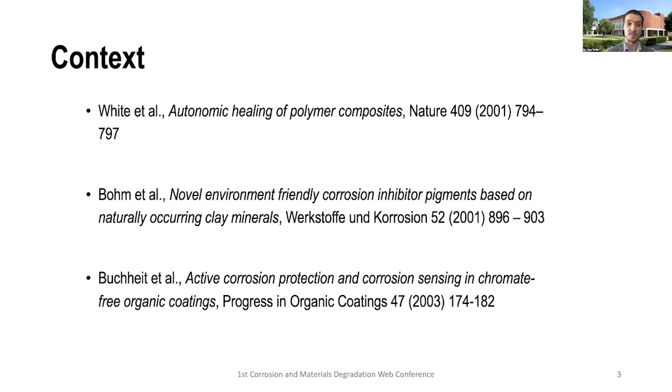Just to make a common ground on the understanding of the concept I'm going to talk about today, one of the ideas related to micro nano containers was that we would try to use a corrosion inhibitor, the active species conferring active protection, and somehow immobilize or encapsulate it in an inert or hosting structure, whose main function was to store and release these active species in a controlled way.

Hopefully the interaction of this corrosion inhibitor with the container would provide an additive for coatings that would eventually equalize or even surpass some of the most relevant inhibitors for certain applications, namely chromates, while removing the environmental or harmful effects associated with some of these species. I think this was one of the primary ideas and concepts coming into this field.

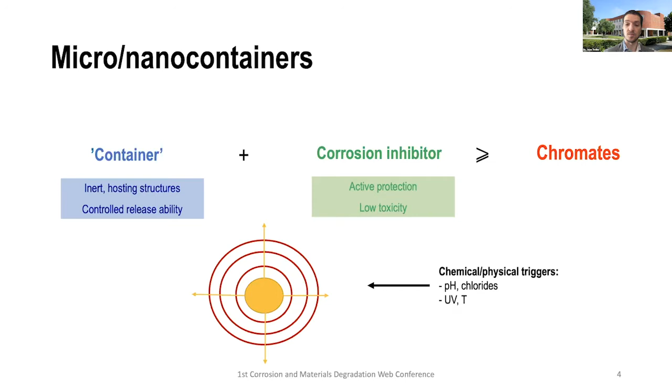The approach we have been following over the years, and I think most of us working in this field have been trying to follow, was basically different stages of development. In the beginning we would try to find the active species for the application. If we're talking about corrosion protection, it's a corrosion inhibitor; for corrosion detection, some molecule with a sensing ability; or for antifouling coatings, antifouling compounds.

So there was an initial stage of selecting and screening the active species. Then we would take into account the physical-chemical properties of these compounds and the targeted or wanted triggering conditions, and try to immobilize or encapsulate these species in different systems. The list is very wide: ion exchange clays, mesoporous materials, polymeric capsules. There are many systems published so far, too extensive to mention them all, but there are indeed several systems published by many groups around the world.

After this immobilization or encapsulation, the idea was to validate and evaluate the materials. So in addition to characterization of morphology, textural properties, and particle size, it was also relevant to validate the release mechanism and triggering conditions, and then test them in model coatings and modified coatings to really see if there was an increase in performance.

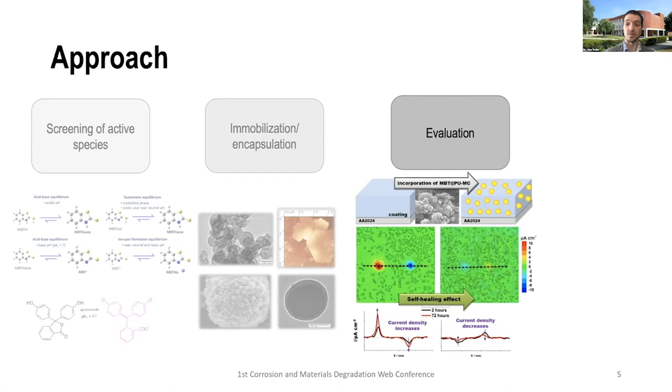If you're talking about corrosion protection, you're also talking about the extent of protection of the underlying substrate. But quite often it was also necessary to go through optimization stages, which include changing the surface of these materials to control or change the loading, or combine different species, but also, very often in collaboration with industry, it is necessary to modify the formulations. Coating formulations are complex systems, and to get the best of both worlds, a compromise between barrier properties and active corrosion protection, the recipe of the formulation often needs to be changed and addressed.

Now, looking at this approach, which I've tried to keep as general as possible, I find that we are currently living in a stage where, looking at these stages of development as a material scientist working more on the experimental field, there are several tools we can use to improve the way we design and get these materials and gather more information about them. That's basically the content of the topic I will cover now.

In terms of the screening of active species, I'll show a few examples of how we can use interactive data tools, machine learning, and molecular modeling to help us select active species. I'll also talk about materials design, showing examples of how we can use DFT and classical molecular dynamics to get a better understanding of the stability and dynamics of the release of active species.

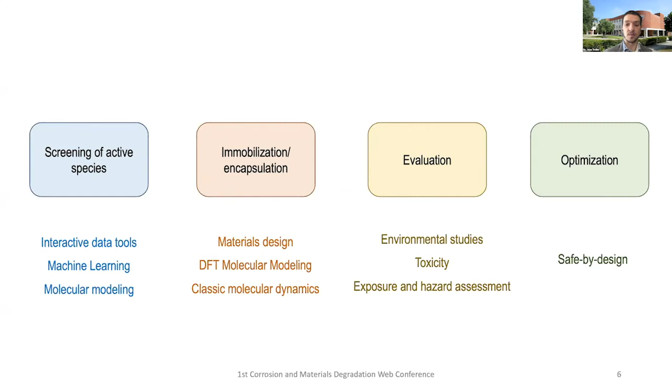Another possibility in terms of screening is using DFT, which has been used widely by some groups, not only to calculate adsorption energy and understand the interaction of the molecules with the hydroxides or the oxide, hydroxylated oxide, or the bare metal as a function of pH, but also to have insights on the speciation of the inhibitor in terms of acid-base equilibria and tautomeric equilibrium.

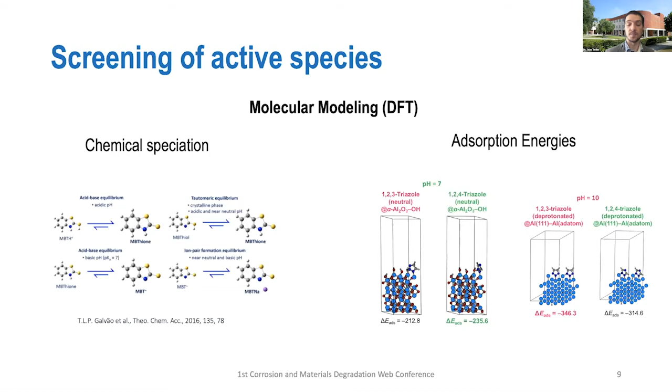Another possibility is to use molecular dynamics, and we can use ab initio molecular dynamics to, in addition to the adsorption energy and stability of the interaction, get information on the dynamics of the interaction. Here I'm showing an example of a triazole isomer interacting with the surface, and we can see that in the presence of chlorides there is competitive adsorption. We can use these models for very short time frames to understand this interaction.

We realized that this isomer of triazole was not very efficient from the experimental data we obtained, and we could understand this lower inhibition efficiency through this competitive adsorption with the chlorides on the surface. So we can use computational tools not only to obtain information on stability, but also on the dynamics of interaction.

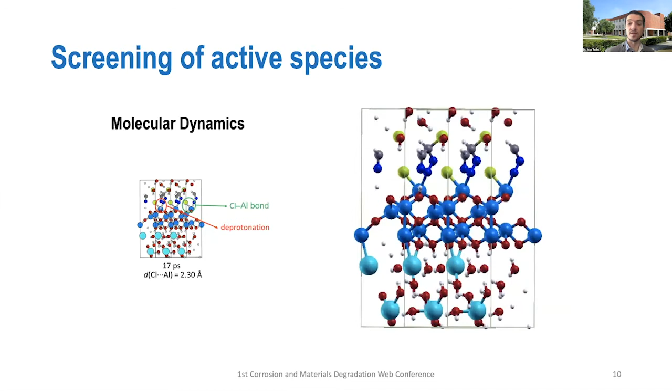Talking about materials design, one of the systems we have studied for a very long time is layered double hydroxides. These are ion exchange clays, built of positively charged mixed metal hydroxides. Between the mixed metal hydroxides, we have labile anions and water molecules which stabilize the structure.

A long time ago, we saw that depending on the inhibitor that intercalates, there is a controlled release, and we can use this to render active protection to the substrates.

However, despite being able to characterize and see the expansion of the basal spacing, the distance between the layers, when there is accommodation of the corrosion inhibitor, this is a structural proof that the compound is intercalated, and later we see by release studies that it is released. It's still necessary to have additional understanding of how the inhibitor is there, and how to have the molecule organized along with the water molecules.

So here we use classic molecular dynamics, and you can see in this snapshot of the simulation that the MBT, the 2-mercaptobenzothiazole used as the inhibitor, is interacting with the heteroatoms with the hydroxide sheets, while the aromatic ring points towards the middle of the gallery space.

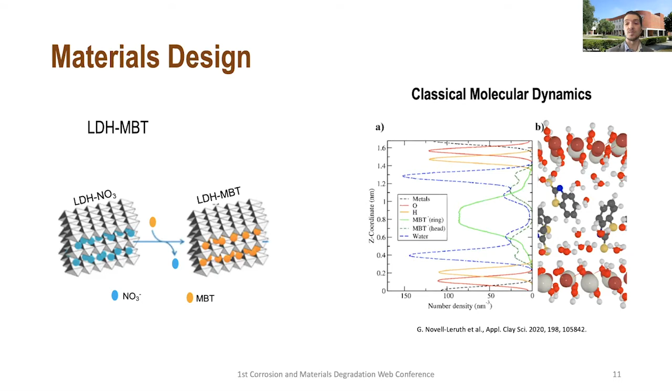In addition to these interactions, we could also see that the basal spacing obtained from this simulation was compatible and consistent with experimental XRD results. So these are examples of how we can use molecular dynamics to understand the position of the inhibitor within the galleries.

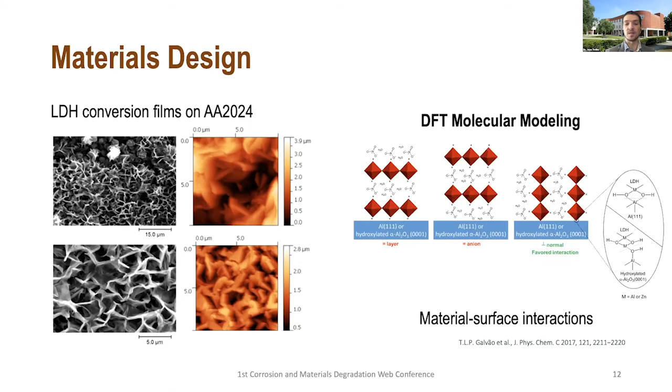Perhaps one of the most interesting things we have associated with LDH is this controlled release, this ion exchangeability, having exchange of intercalated inhibitor with some species in the environment, most notably chlorides.

We saw in 2012, in one of the studies we published, that there was a controlled dependence on the nitrate release from the LDH in the presence of chlorides. More recently, we tried also to use molecular dynamics to try to see the very first beginning of this interaction.

What I'm showing here is basically a stabilized LDH nanoplate in which we have the chlorides being exchanged on the edges of the LDH on a very short time frame. We are talking about a nanosecond time scale, and what we're trying to do is increase the simulation time so that we can see what happens in the later stages and try to approach more the experimental release time scale that we see.

Going to a more experimental approach, as I mentioned in the beginning of the presentation, it's also very important that we understand the environmental impact of the things we are trying to develop. MBT is a harmful species for the environment, although it's an effective inhibitor for aluminum alloys. One of the things we tried to address was the effect of having MBT intercalated on LDH for the environment, with respect to the non-encapsulated or immobilized MBT.

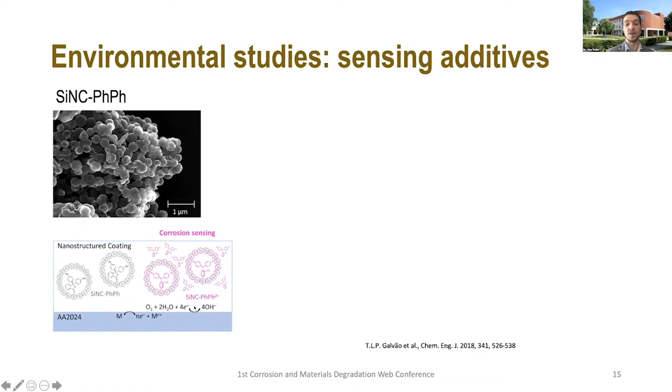Another study was done with additives that we wanted to use to help detect corrosion, coating degradation, or initiation of corrosion processes. One of the systems we developed was silica nanocapsules with phenolphthalein. We used a pH indicator to reveal increase in pH on a coated substrate, and we could see that only the encapsulated form was able to turn color, whereas the free phenolphthalein could not turn color. So there was a deactivation of the phenolphthalein when dispersed in the coating.

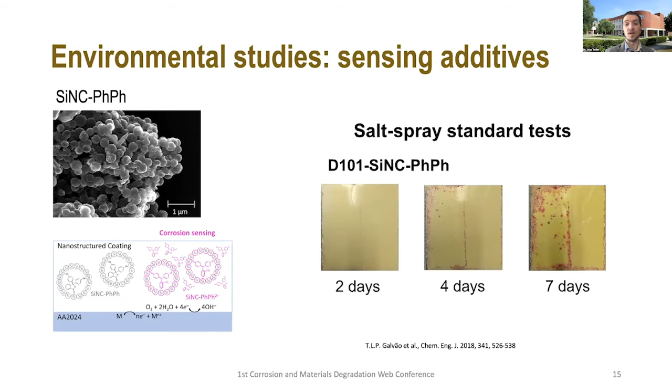Another type of additive we were considering was developed more recently. We intercalated hexacyanoferrate on LDH, and the idea was to control the release of hexacyanoferrate in presence of chlorides. We could see that the released hexacyanoferrate would then react with the iron cations from the anodic reaction and form the well-known blue pigment, Prussian blue.

We could see this not only upon anodic polarization, but also in a kind of drop experiment where we had sodium chloride solution with the LDH pigment dispersed. Over time, there is this yellowish color associated with the release of hexacyanoferrate in presence of chlorides, and with time you see the formation of the blue precipitate in the middle, associated with the reaction of iron with hexacyanoferrate.

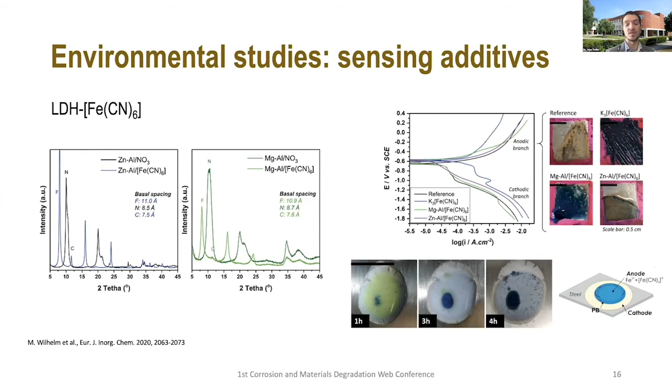So why am I presenting these additives here? Because not only do we want to change the coatings, but we also have to be sure about the environmental impact these materials can have. Our colleagues in environmental studies tried to see what would be the effect of the intercalated or immobilized versus the free sensing compound. They saw for the LDH, similar to MBT, that it was helping reduce the toxicity effect of the hexacyanoferrate, which was not very high compared to MBT.

But for phenolphthalein, we found different results. We saw that the silica phenolphthalein capsules were actually inducing more toxicity than the free phenolphthalein. This was ascribed to the presence of remnants of the surfactant from the synthesis. We could not remove the surfactant; we could try washing, but we could not calcine the silica, otherwise we would also calcine the phenolphthalein, which is also an organic compound, and we would lose the sensing ability.

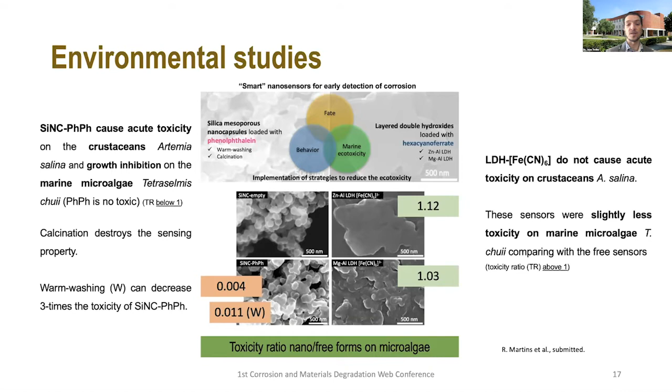So to introduce our last point of the presentation, we used this information to come back to the synthesis process and, using a safe-by-design strategy, try to see if we could change the material that we were using.

Instead of using CTAB to stabilize the emulsion, this is an oil-in-water emulsion used to encapsulate - here is the process for MBT, but it's similar for phenolphthalein - we tried to replace CTAB with a Gemini surfactant that we synthesized in the lab, which was found to be less toxic than CTAB. So we obtained the capsules, and here we can see an example of these silica nanocapsules obtained using another surfactant, and we were able to intercalate and immobilize this active compound, which was phenolphthalein.

The question was, were we able to reduce toxicity of these capsules with a different surfactant? Yes, indeed, we were able to see a reduction in toxicity when comparing the silicas obtained with the CTAB surfactant with respect to the Gemini surfactant. So it's not a fully non-toxic material, as we can see, but it shows a way we can follow as material scientists, to come back to the synthesis process.

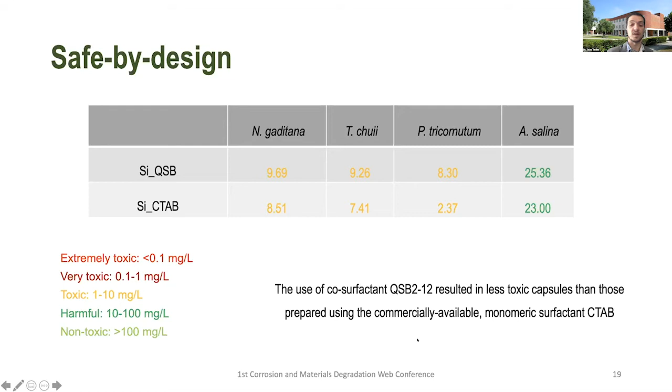So as I was saying, the use of this QSB2-12 surfactant results in less toxic capsules than those prepared with CTAB. Last but not least, I'd like to acknowledge all the funding, because I'm just showing here a glimpse of several works done in collaboration with different groups. I would like to thank the funding organizations and you all for your attention.

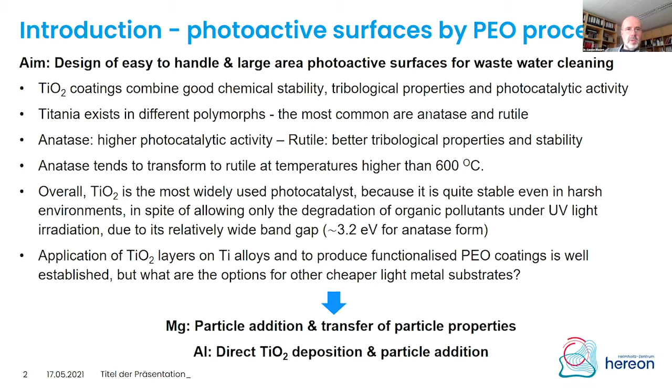However, those sparks are not only beneficial, they also damage the coating. There are remains of the discharge channels and also inclusions, because there are melted phases in which gases are dissolved. They also cause this porous layer structure because of gas inclusions and the remains of the sparks. Overall, the coating, one can say, is in most cases actually a composition of the alloy plus the electrolyte components we are using. One can use different processing conditions to adjust between amorphous and crystalline phases.

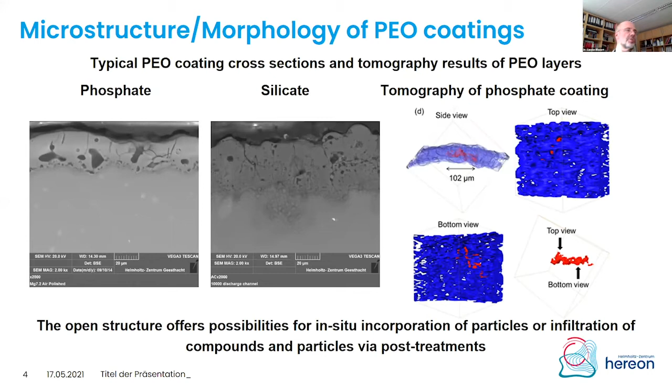So coming now to the first example, how we can functionalize magnesium alloys, I would like to show you a little of what we did. Basically you use a standard electrolyte, a phosphate-based electrolyte, and we added different amounts of titanium dioxide particles to the electrolyte, which is basically anatase because it has the better photocatalytic properties. We used two different voltages.

So it was a constant voltage processing in the PEO case at 400 and 500 volts, basically to see the effect of different energy levels on the incorporation of the particles.

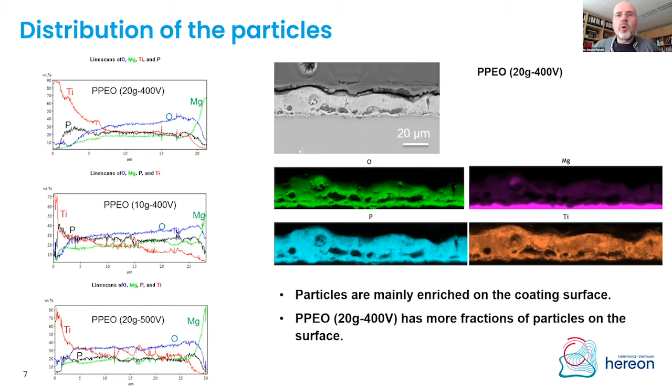Basically, you are continuously increasing the titanium dioxide concentration on the surface. Looking at the mapping and also the line scan, it's quite obvious that most of the particles are incorporated via the surface. They are sticking in melt pools on the surface and are immobilized there. However, there is titanium dioxide throughout the full layer, indicating there is a chance to incorporate them via the open pores, and they can even reach the interface.

So for the actual photocatalytic properties, it's more important that they stick at the surface. With increasing amount of titanium dioxide additive, we can continuously increase the titanium content on our surface, and with a 20 gram addition, regardless of whether it's running at 400 or 500 volts, we can reach somehow up to 20% titanium dioxide, or titanium, at the surface—titanium being an indication that we mainly have titanium dioxide. I'll show you this in the next slide.

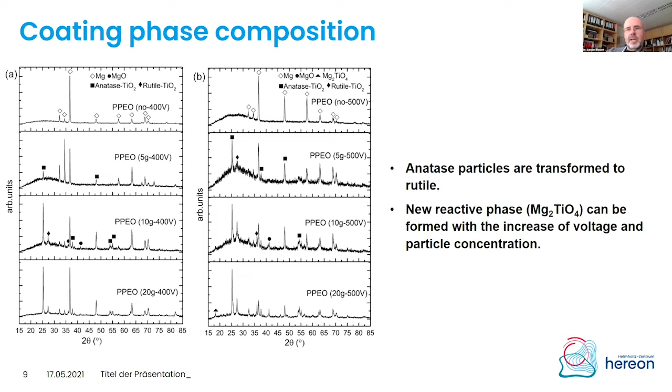So let me show you the second example, how we can functionalize the coatings—this is for aluminium. Now we have the chance to work with acidic electrolytes, which we did here; the pH was somewhere around 3. This is also an explanation why we cannot use the same approach for magnesium, because the magnesium PEO process cannot start with this pH value.

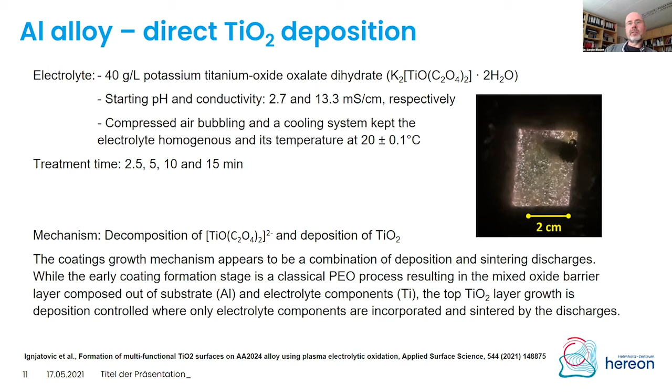Actually, it was even a surprise for us, because with this electrolyte, we have deposition of titanium dioxide, which comes obviously from a decomposition of the oxalate, titanium oxide oxalate complex. And that gives us the chance to actually get pure titanium dioxide layers on aluminium, where normally, when we do standard electrolytes, a treatment would give us aluminium oxide as the main phase.

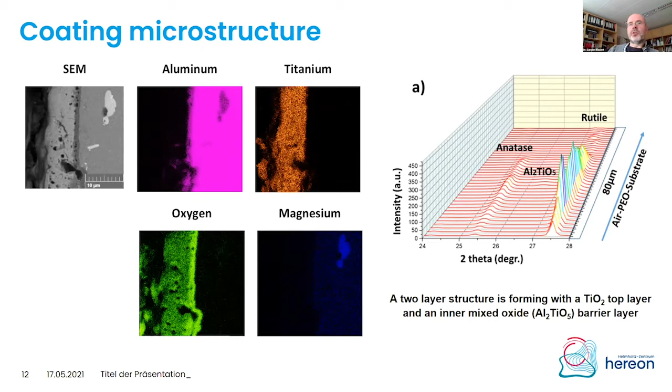And we were looking at the anatase and the rutile peak. This you see in this part, about 80 micrometers in depth. We were following the distribution of those two peaks. And you can also see here in the diffraction patterns that there's an interface layer related to the aluminium-titanium oxide 5 phase, the mixed oxide.

This is the second part of the aluminium presentation, dealing with how we can now get a better ratio between the anatase and the rutile. For that, we have added, similar to the magnesium example, from 5 up to 30 grams per liter of anatase particles to the electrolyte.

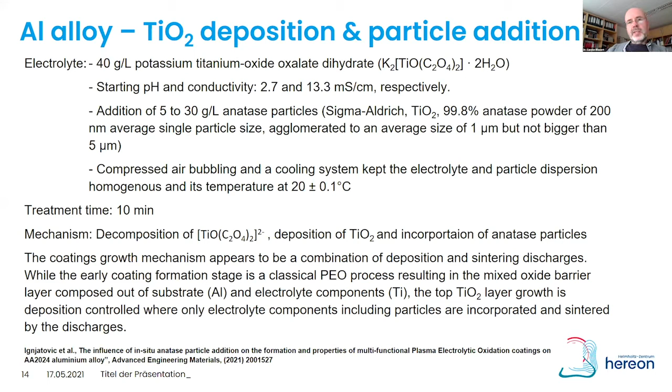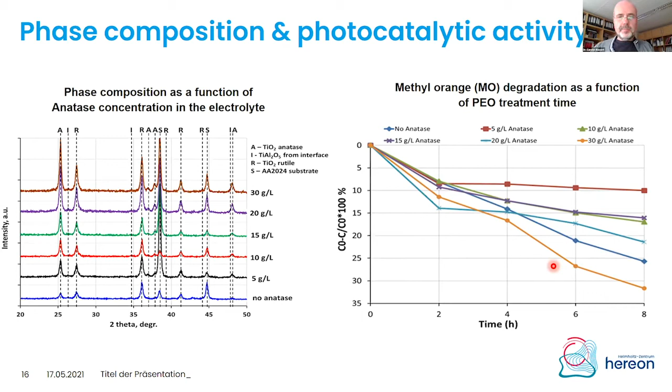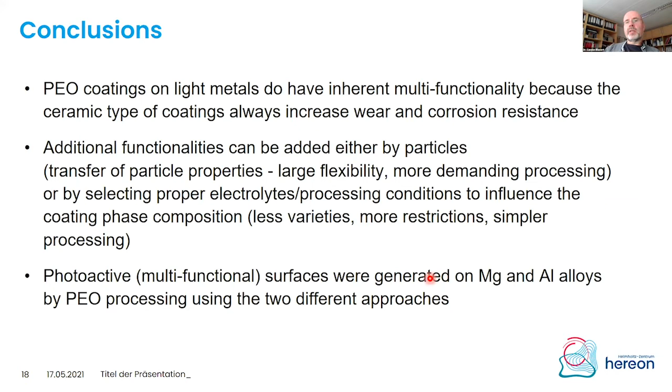However, particles in PEO processing are more demanding from the PEO side, so one has always to think about alternatives. For example, functionalizing the coating directly from a simple electrolyte is, from an industrial point of view, much more promising. However, you have less variety when you try this - you're more restrictive in the selection of substrate and electrolytes, but you have a much simpler PEO processing. Finally, photoactive surfaces can be generated on magnesium and aluminum alloys using the PEO process.

Thank you very much for your attention.

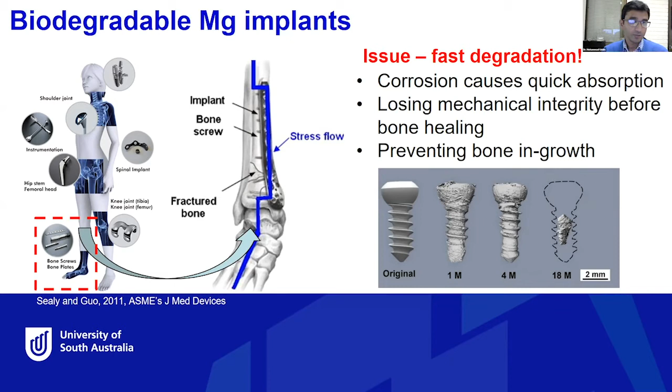There are many techniques being used in current research, as other speakers have already discussed in their presentations. So today, there are the techniques.

The first technique is developing a new type of alloy with magnesium, adding different chemical elements to really improve the microstructure and also improve the corrosion resistance and other mechanical properties. This is the first one people have been trying, but the problem with new alloying or adding new materials is there's always potential toxicity, so we need to do a lot of trial and test and study to understand what kind of new alloy or element could be added.

The next one is coating. This has been predominantly studied in the literature, and like other speakers already indicated, even Carsten mentioned, trying to use different types of coating, really biocompatible, thin to thick coatings, to really improve the corrosion resistance. Coating is generally very thin, it could be porous, and there is a potential of breakage and losing integrity. But still, some coatings have been quite successfully developed, providing quite beneficial effects in resisting corrosion.

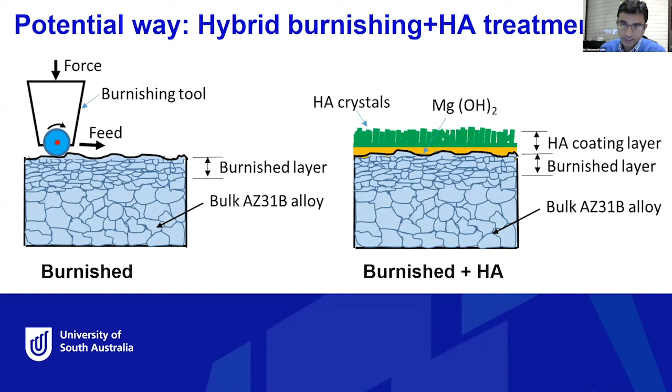So in this research we are studying this combined approach, which is a combination of ball burnishing and hydroxyapatite. We are going to do the ball burnishing first, and then deposit hydroxyapatite on top, and see how the combination of this hybrid modification or treatment can improve the surface integrity as well as the corrosion resistance. That is the objective we are trying to investigate in this particular study.

Some of the parameters involved in the ball burnishing and HA coating: ball burnishing was done with a very hard silicon carbide ceramic ball, 6 millimeters in diameter, using 200 bar of hydraulic pressure, equivalent to 565 Newtons, which is a fairly reasonable force to make modifications into the microstructure. The feed rate was 100 millimeters per minute, and 0.2 was the step-over, which is the side step.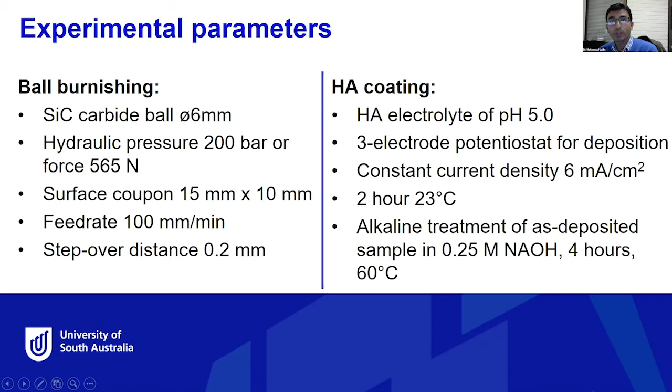After the electrodeposition of the HA coating on the sample, we then did an alkaline treatment in a 0.25 mole sodium hydroxide solution for 4 hours at 60 degrees centigrade. This is because HA is generally formed as a calcium phosphate based coating, which becomes very porous and amorphous, so we use the alkaline treatment to convert the biphasic HA coating into the complete HA coating.

So this is our surface topography, and we have done some surface roughness investigation. We can see that because the HA coating is a bit rough, and because of its plate-like structure, it's not very uniform or completely dense and homogeneous. Because of that, the surface roughness is higher compared to the untreated or burnished surface. So it's a bit rough surface.

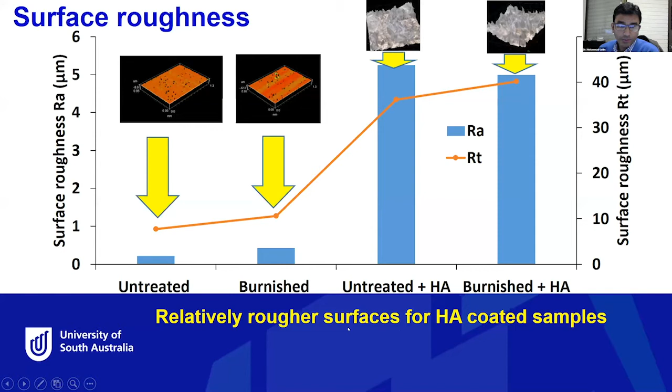We did some EDS analysis to see the chemical composition of the treated and untreated surfaces. Compared to the untreated and burnished surfaces, there is no coating present there. We can see the presence of calcium and phosphorus, which are the key elements of the HA coating, which indicates that the HA coatings were deposited onto the surface successfully.

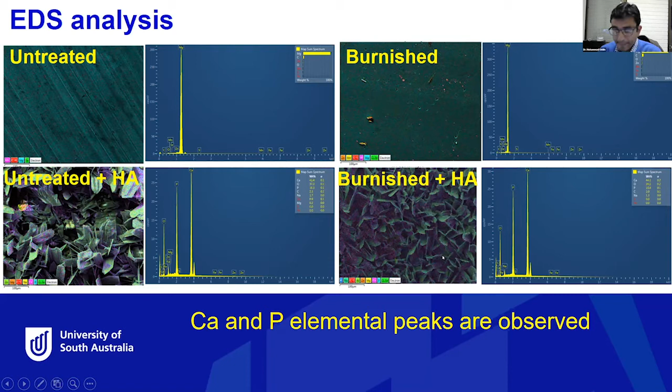In order to further investigate the chemical composition more accurately, to determine the presence of the elemental composition on the coating, we also performed XPS spectra analysis. The XPS analysis gives us more confirmation of the presence of the elements, since often the EDS may not give us the actual information.

We can see here the presence of calcium and phosphate, and also magnesium in the case of the untreated surface. We also have plenty of oxygen and some aluminum element here, which is part of the composition of the magnesium alloy, AZ31B.

We can see there is a little presence of magnesium in the case of the untreated and HA coated surface, because the HA coating covers the substrate. But in the case of the HA coated surface, either untreated plus HA or burnished plus HA, you can see a large peak of calcium, indicating its presence. Similarly, we have the phosphorus element present in our XPS spectra. This is another confirmation of the deposition and successful formation of the HA crystal.

One indicator of HA is the calcium phosphorus ratio, so we quantitatively analyzed what the calcium phosphorus ratio is. We found that for the HA coated surface, the calcium phosphorus ratio for burnished plus HA is around 1.62. But in the case of untreated plus HA, it is a little bit lower than even 1.62.

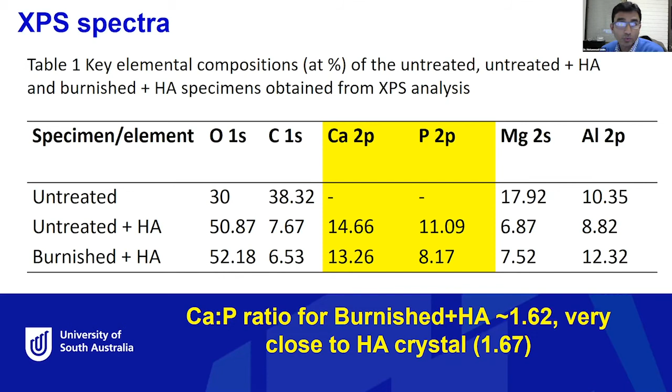We also looked into the cross-section of the coated surface, and we can see the cross-section of the HA coating by SEM and also the EDS.

This is the untreated plus HA coated cross-section. We can see that generally this is the substrate, and then there is a bit of formation of the magnesium hydroxide. This is very common when you deposit any kind of HA coating onto the magnesium, because it initially forms a magnesium hydroxide barrier, a very thin barrier layer, and then on top of that we have the HA coating.

We can see the same thing exactly in the burnished plus HA coating. One interesting thing is that in the case of untreated plus HA, the magnesium hydroxide layer is a bit thicker than when you do the HA coating on a burnished surface.

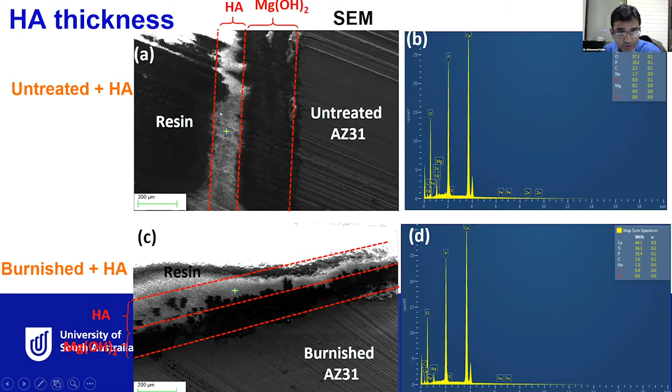So this is another benefit of the mechanical surface treatment — you can improve the mechanical property as well. To see what happened to the microstructure of this material, this is the untreated microstructure.

We can see that the grain of the microstructure is quite large, as you can see here, quite uniform with a large grain distribution.

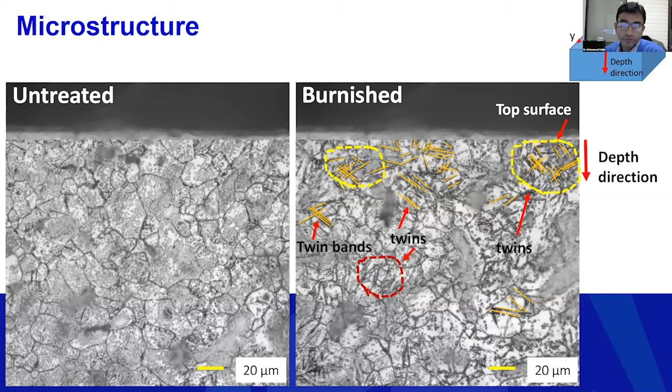We also looked into some other mechanical properties, residual stress. We can see that by applying the burnishing, we can induce a compressive residual stress into the top surface, and it decreases as you go down along the cross section.

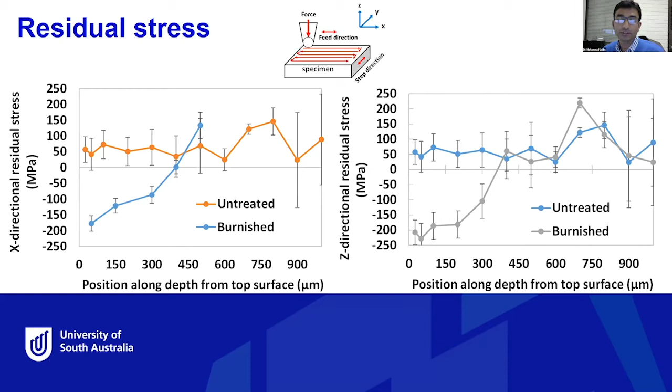Compressive residual stress is always beneficial in terms of suppressing potential cracks, and it's also going to prevent potential corrosion. We looked into the residual stress in the feed direction and the force direction during burnishing, and we can see that in both directions we have been able to create compressive residual stress rather than tensile stress. This is the benefit noted in the literature: compressive residual stress is always going to improve the corrosion resistance as well.

Just to see how the HA coating is actually bonded together with the surface. I think we have to come very soon to the end in order to not create further delay.

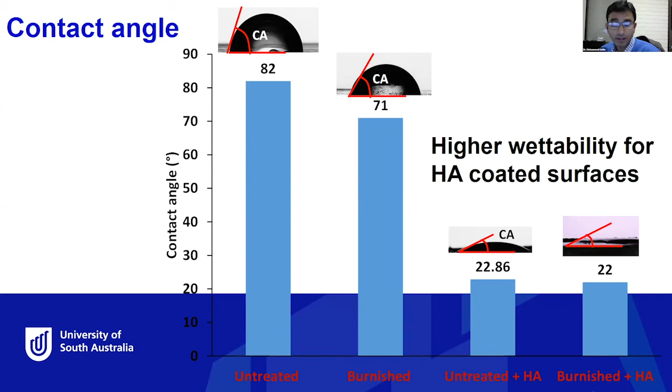This is the summary of the corrosion results, again indicating that burnish plus HA coating gives the highest corrosion resistance compared to the untreated or even the simply burnished surface. The corrosion potential is higher and the corrosion current is lower, meaning higher corrosion resistance.

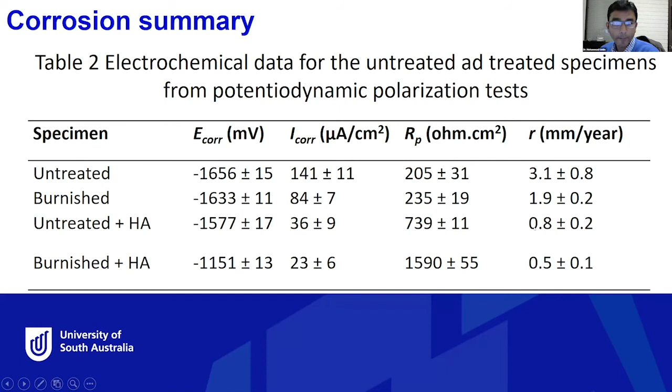Finally, I have a corroded elemental analysis, showing the retention of elements as the surface degrades. In the burnish plus HA coated surface, we see calcium and phosphorus increase, which is natural since it has an HA coating on top, but we see less magnesium in the burnish plus HA coating case. This means less degradation, or fewer corroded products generated, in the hybrid treated surface.

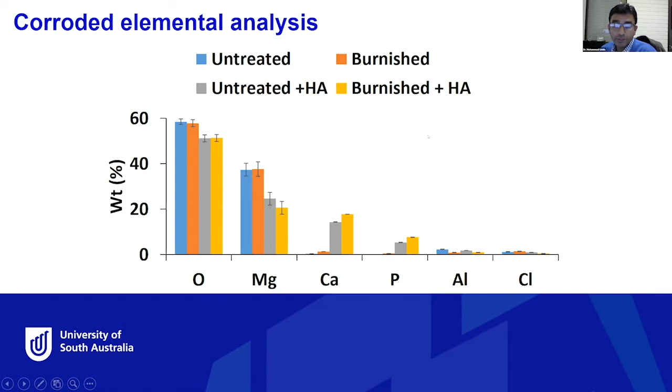To conclude, burnishing improves surface integrity in general, and we can deposit a very dense and compact, flat-like HA coating onto the burnished surface, with a thickness of 100 micrometers. Burnishing not only increases HA coating deposition but also increases hardness at the top surface. It induces microstructural changes up to 95 microns deep, with twins and twin bands, which we believe increases the surface activation energy that allows successful HA coating deposition.

Burnishing also induces compressive residual stress that is beneficial for reducing cracks and fatigue, and helpful for corrosion protection. We demonstrate that overall, burnished and burnished plus HA coated surfaces provide higher corrosion resistance, and hopefully this process will provide additional resistance against degradation, preventing degradation of the magnesium alloy. That's the end of the presentation, thank you very much for your time.

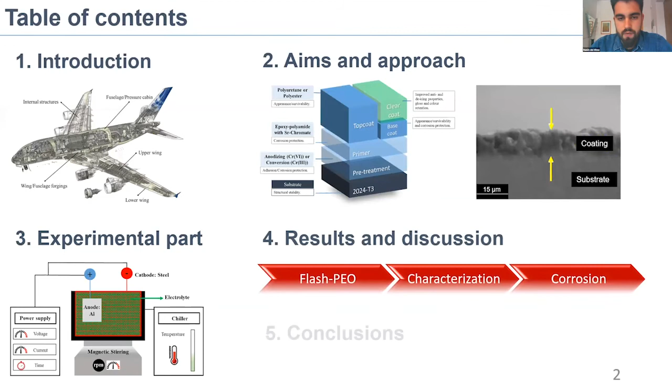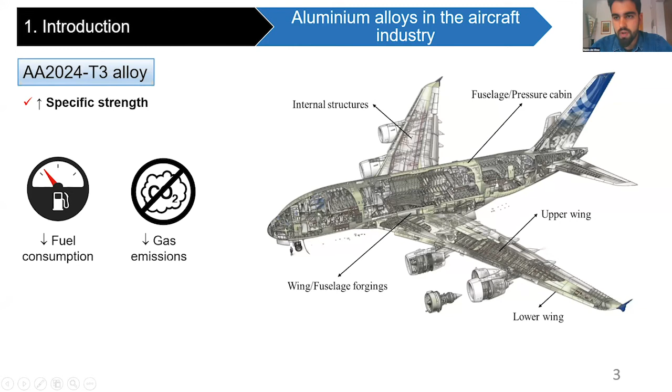First of all, I'd like to highlight that the most widely used aluminum alloy in the aircraft industry is 2024-T3 aluminum alloy. This is due to its high specific strength, which allows decreasing fuel consumption and gas emission during the aircraft life service. However, the main limitation of this alloy is its low corrosion resistance.

For this reason, this alloy is usually surface treated with a multi-layered protection scheme, which consists of a pretreatment, a primer layer, and a mono or bilayered paint system, depending on its application. It should be noted that the quality of this multi-layer protection scheme depends on the quality of the pretreatment, which must show high adhesion and corrosion protection.

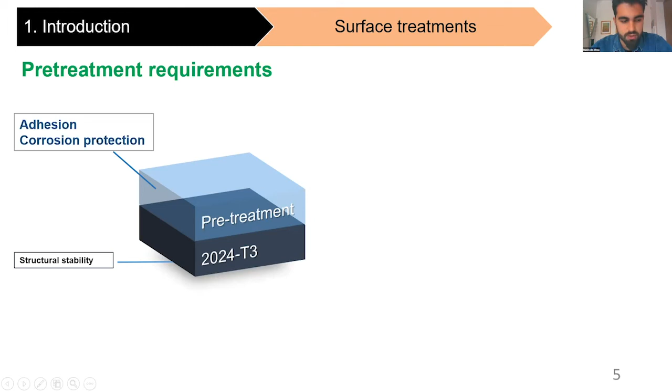So far, the most widely used surface treatment is chromic acid anodizing, which promotes the formation of uniform coatings with thickness between 2 and 7 microns. It's valid for fatigue critical components, offers fair paint adhesion and excellent corrosion resistance. However, the use of chromium-based compounds has been targeted as toxic and carcinogenic, so the European Union required its elimination before 2024.

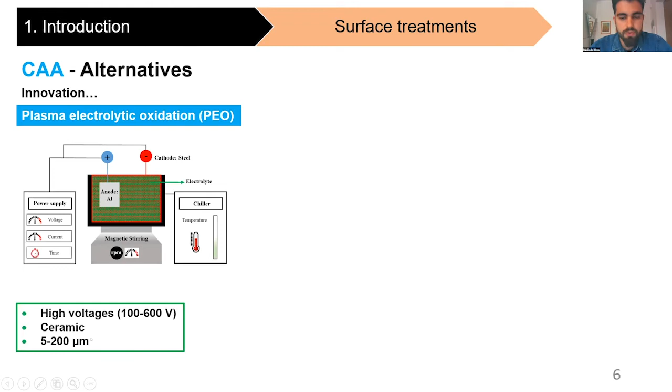An innovative alternative is plasma-electrolytic oxidation, PEO, which is an electrochemical treatment characterized by the use of high voltages and long treatment times, giving rise to the formation of ceramic coatings with thickness between 5 and 200 micrometers. This is conventionally useful for wear-sensitive applications in the aircraft industry.

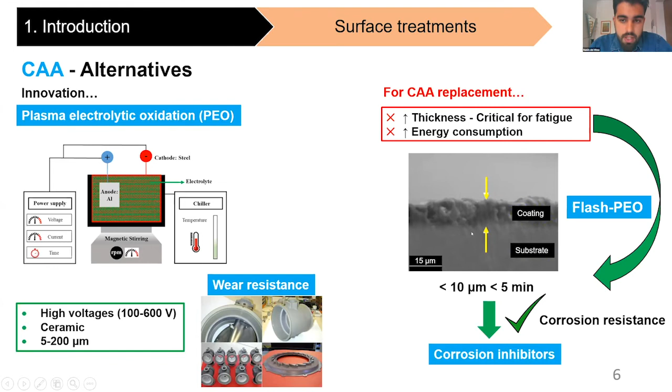However, for chromic acid anodizing replacement, this high thickness value is critical for fatigue-sensitive components, and the inherent condition of this process involves high energy consumption. So a possible way to overcome this limitation is the formation of flash PEO process, which consists in the formation of PEO coatings with low thickness value using low treatment times. A possible way to increase its corrosion resistance is the incorporation of corrosion inhibitors into the coating structure.

So the main goal of the present work is growth of flash PEO coatings on 2024-T3 aluminum alloy with the incorporation of several corrosion inhibitors. Then perform a screening process based on surface appearance, thickness, and corrosion resistance. Finally, evaluate the selected coatings according to characterization techniques, corrosion behavior, and paint adhesion.

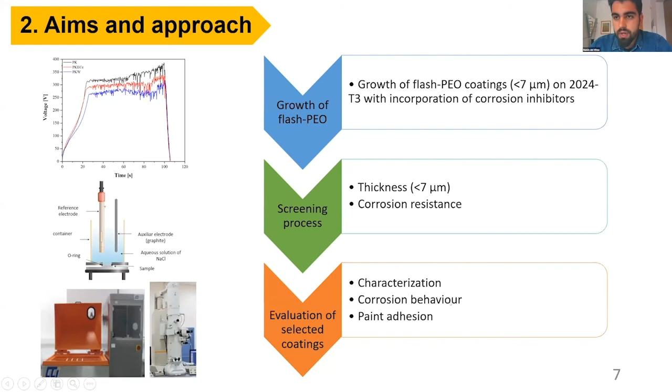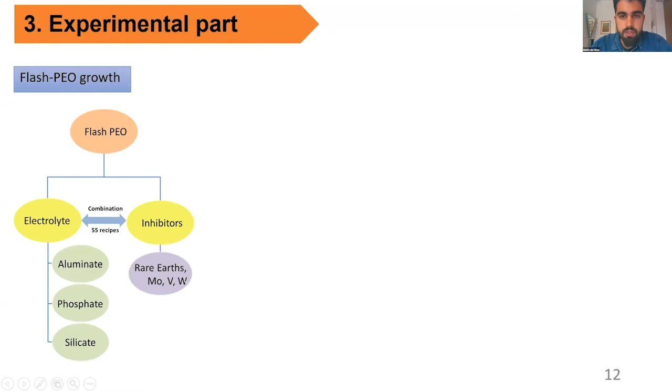Regarding the experimental part, our base material is 2024-T3 aluminum alloy. We performed the specimen preparation according to industrial procedure prescribed by Henkel company. We studied the formation of flash PEO coatings using several types of electrolytes and different corrosion inhibitors, and studied these coatings by characterization techniques like scanning electron microscopy, X-ray diffraction, and water contact angle.

The corrosion evaluation was performed by electrochemical impedance spectroscopy and neutral salt spray test according to aircraft standard. Paint adhesion capacity was performed according to this standard and with paints provided by AkzoNobel.

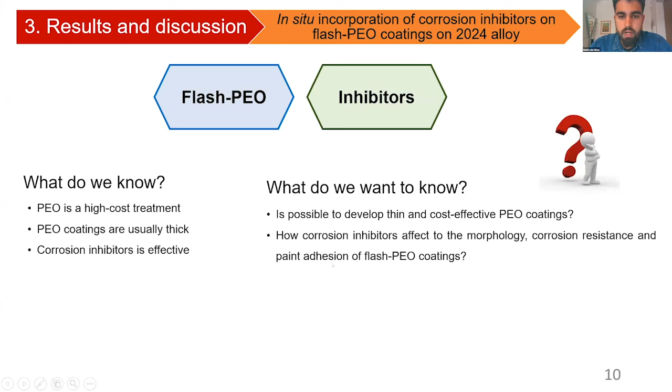At this moment, we know that PEO is a high-cost treatment, PEO coatings are usually thick, and corrosion inhibitors are an effective way to increase the corrosion performance. So we would like to know if it's possible to develop thin and cost-effective PEO coatings on 2024 aluminum alloy, and how corrosion inhibitors affect the morphology, corrosion behavior, and paint adhesion of these flash PEO coatings.

So for this, our first stage was to perform a screening process using low current densities, a voltage limitation, and short treatment times in different electrolytes. After the first screening process, based on electrochemical measurements, we concluded that phosphate electrolyte is the most suitable to study inhibitor loading processes. We studied vanadate, molybdate, lanthanum, tin, tungstate, and cerium.

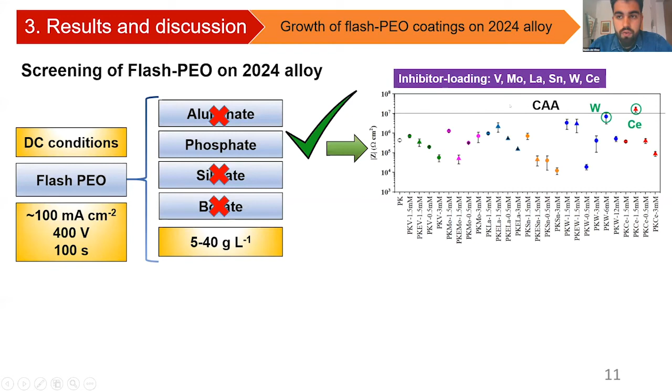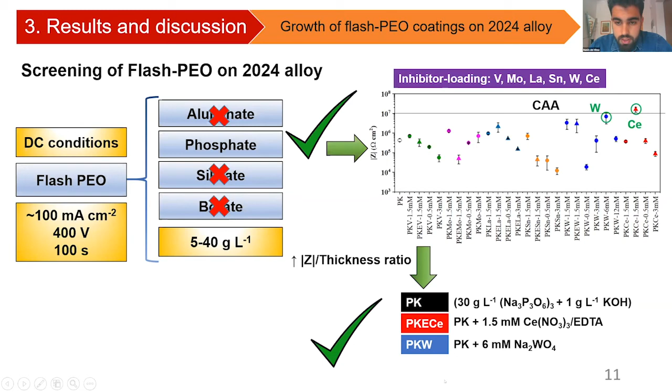According to the impedance modulus during 1 hour of immersion time in sodium chloride solution, we concluded that cerium-containing and tungstate-containing flash PEO coatings were the most corrosion resistant coatings. So for this reason, these coatings were selected for further analysis.

The voltage-time curves of these coatings reveal similar trends in all cases. For inhibitor-free PEO coating, the black curve, and red and blue for inhibitor-containing coatings with cerium and tungstate, which reveal lower voltage values and lower breakdown voltage values also.

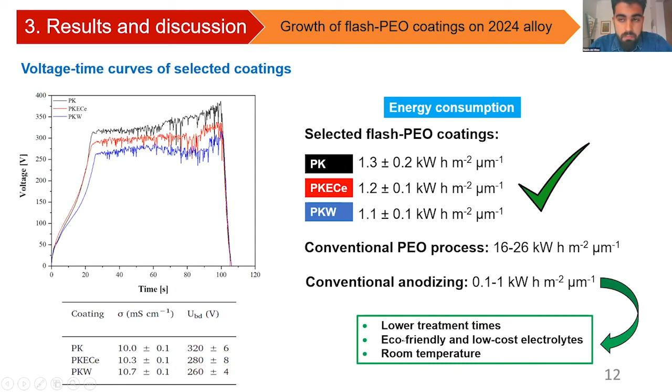The energy consumption of these coatings was significantly lower in comparison to conventional PEO process. It's true that compared to conventional anodizing we get slightly higher values, but as a counterbalance we use lower treatment times, an eco-friendly and low-cost electrolyte, and we perform the formation of these coatings at room temperature.

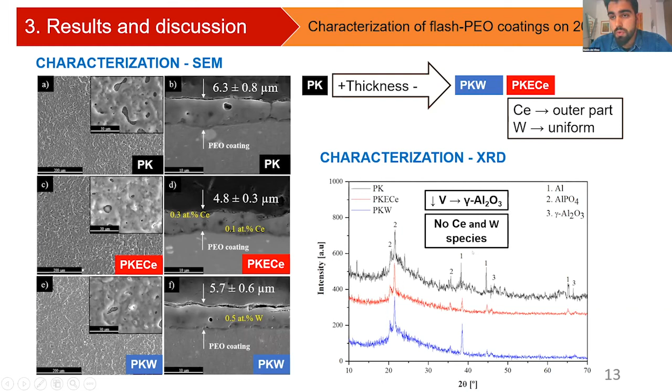The X-ray diffraction patterns reveal the formation of gamma alumina as the most predominant phase, probably due to the low voltage used in the present work. No cerium or tungstate species were detected in these X-ray diffraction patterns, probably due to their low concentration in the electrolyte.

Regarding corrosion behavior, in short-term studies we achieve higher corrosion resistance for inhibitor-containing PEO coatings compared to inhibitor-free, which could be related to less soluble cerium and tungstate species in the coating structure. Although in the case of long-term corrosion study, we achieve similar corrosion protection.

Regarding water contact angle values, we confirm that all coatings were hydrophilic. For inhibitor-free PEO coating we achieve very bad paint adhesion. By contrast, for inhibitor-containing PEO coatings we achieve improved paint adhesion, especially optimal in the case of cerium-containing flash PEO coating.

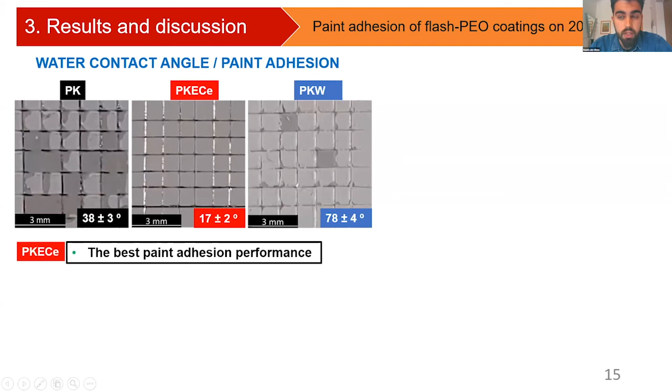Then we evaluated this corrosion behavior as a full system with paint, using neutral salt spray test for 1,000 hours on both inhibitor-containing PEO coatings, and we obtained similar long-term corrosion behavior in both cases. We also didn't detect any blisters or pitting formation during the test.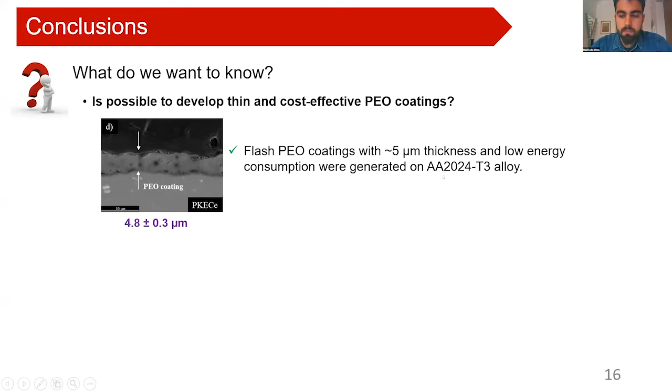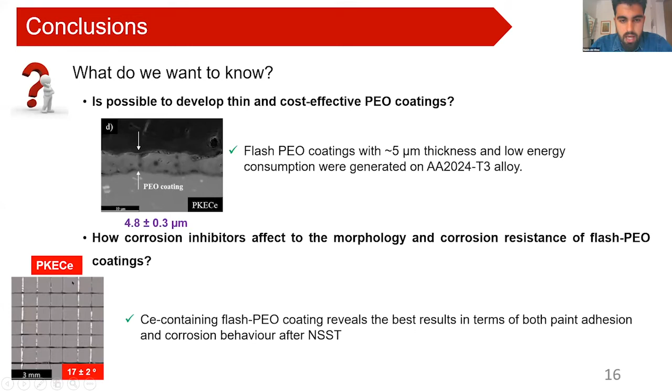In conclusion, it's possible to develop thin and cost-effective PEO coatings with thickness between 4 and 6 microns and low energy consumption on 2024 T3 aluminum alloy. Also, regarding the incorporation of corrosion inhibitors, we ascertained that cerium-containing flash PEO coating reveals the best results in terms of both paint adhesion and corrosion behavior after neutral salt spray test.

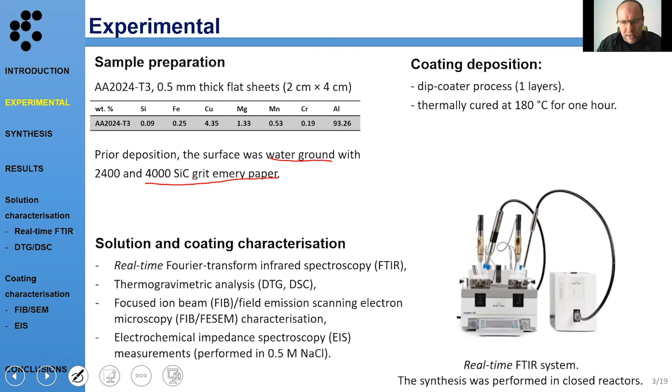So here is the experimental part. As mentioned at the beginning, we have aluminium alloy 2024, and here is the composition. Prior to deposition of the coating, the surface was wet ground with silicon carbide emery paper to obtain a smooth surface, and this was prepared for coating deposition.

All coatings were synthesized in this closed reactor because we tried to prepare the best conditions to get results which can be repeatable after a certain time. Also, we want to follow the reactions every minute with FTIR. After preparation, we deposit these coatings with a dip coater, applying one layer on the previously ground surface. After that, the coatings were cured at 180 degrees for 1 hour.

After that, we also perform some characterization: topography, and so on. We also measured thermogravimetric analysis, and performed some analysis with focused ion beam scanning electron microscopy. We also performed electrochemical impedance measurements, which were done in 0.5 M sodium chloride. So here is the synthesis.

The flow chart of this solution preparation consists of two sols. The first sol contains an organically modified silane precursor, which is combined with methyl methacrylate, and in the presence of an initiator, polymerized together to get the final solution. For this presentation, we also replaced 20% of this methyl methacrylate with perfluorooctyl methacrylate. The reason is we want to figure out the effect of this perfluoro group in the synthesis of this sol gel coating.

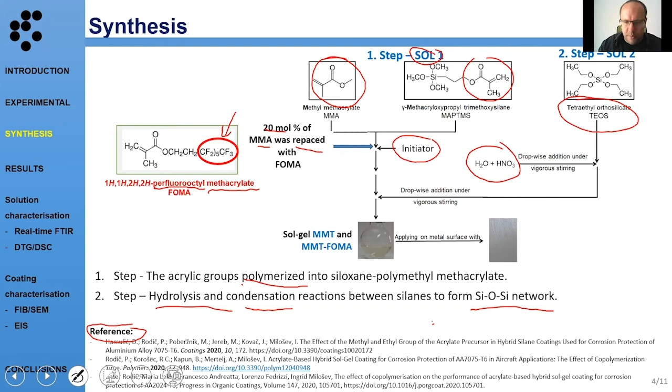However, this is sol 1, so here we will mainly focus on copolymerization. In the second part, the inorganic part, we add water as a reagent to perform the hydrolysis and condensation reactions. After combining both sols together, we obtain the siloxane network. All the other parameters are described in these references, where you can find more details such as polymerization time and other conditions.

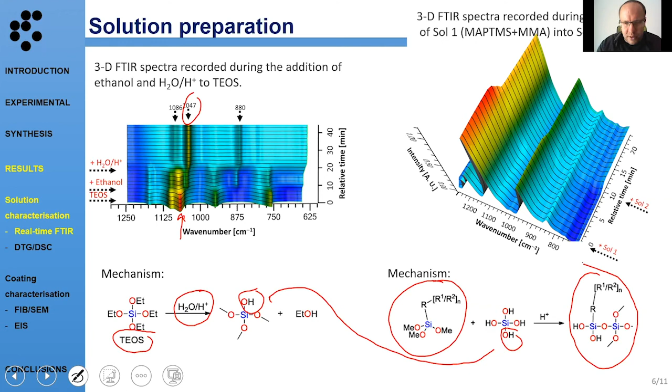So this is very important to understand the reaction, and further when we will compare the characteristics of this coating, we have to know that the addition of acrylates in our solution is very important.

Here are the thermogravimetric analysis results. If you take a look at the plot, we can see three different areas. The first corresponds to water and solvent evaporation, but the most important is the second, which is related to the condensation reaction between all species present in our solution. The third is the thermal decomposition.

However, if we compare the coating without and the coating with perfluoroacrylates, we can see that the coating with perfluoroacrylates is more stable. That means when we add these molecules to our solution, we change the thermal stability.

Moreover, if we also characterize it by high pressure differential scanning calorimetry, we can see that this peak, which is characteristic for condensation, is also shifted to higher temperatures.

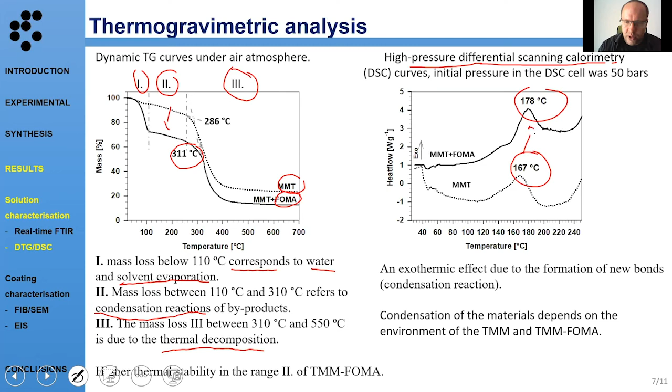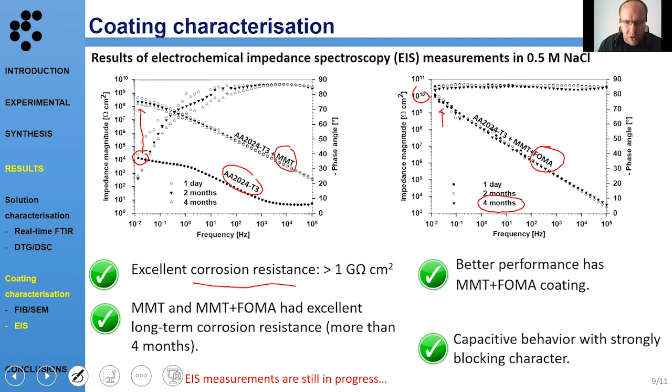But on the other hand, if the coating contains perfluoro molecules, these values are even higher, and it remains even more stable during, for example, 4 months of immersion in sodium chloride solution. That means by modifying this coating, we can tailor and get better corrosion resistance if the alloy is coated with this kind of coating.

So to sum up, we tried to modify this hybrid sol-gel coating with fluorinated methyl methacrylates, and we figured out that there is a very important parameter, and this is the copolymerization process, because this copolymerization process affects things in different ways. First is, of course, the size of these randomly spread nano-sized silicon domains, but also the presence of these molecules changes the thermal stability of this coating.

However, the most important thing is that this kind of coating presents very high corrosion resistance. And of course, it presents a good basis for further studies of barrier coatings. Maybe this will be presented in the next talk.

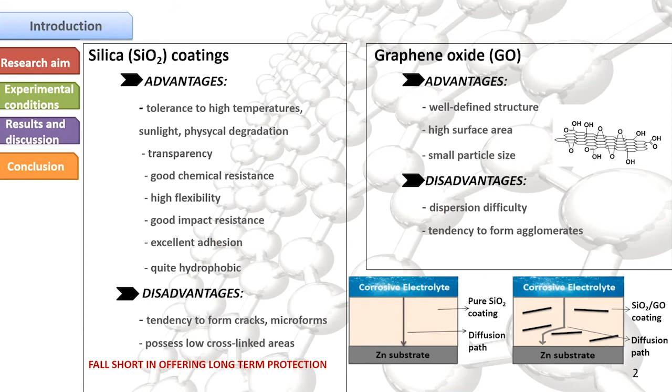Major difficulties occur with the dispersion of the graphene oxide nanosheets in polymer matrices, as they have the tendency to form agglomerates due to their large surface area and surface energy, which provides obstacles in achieving great results.

Our objectives are to increase the long-term protection of silica coatings and to incorporate graphene oxide into the silica matrix. Some steps to achieve this include the study of the GO nanofillers and their surface modification, the morphostructural and physical-chemical characterization of graphenes, and the electrochemical characterization of the coatings using impedance spectroscopy.

At last, the study of the sol aging. Regarding experimental conditions, I don't particularly want to go into details, but importantly, we used a 3-electrode system with sodium sulfate electrolyte to electrochemically investigate the coated and uncoated zinc substrates. Before that, we studied the GO and rGO by Raman spectroscopy.

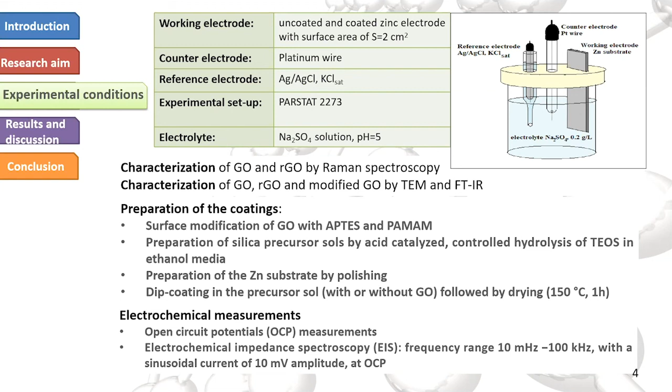We modified the GO and investigated the graphenes by TEM and FT-IR. Regarding the preparation of the coatings, we used the dip coating method. We had 5 precursor sols: the silica sol, and four others containing the graphenes. After dip coating, a drying process was necessary.

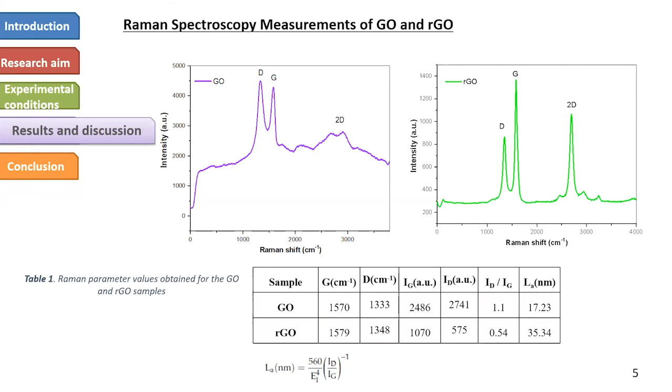The La value from the equation tells us about the oxidation state of the graphenes. The La value for GO was 17 nanometers, and for rGO it was 35 nanometers, which proves that GO has a higher oxidation state and a lower electrical conductivity.

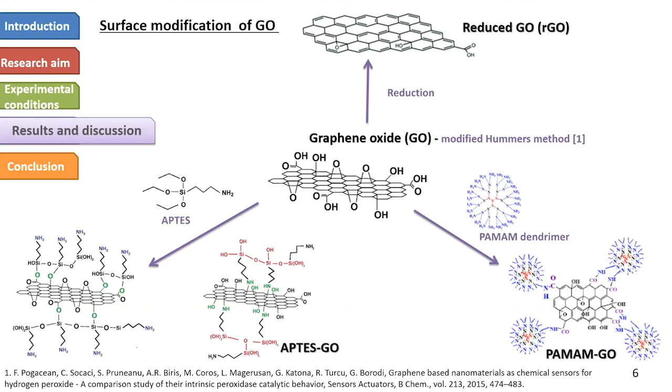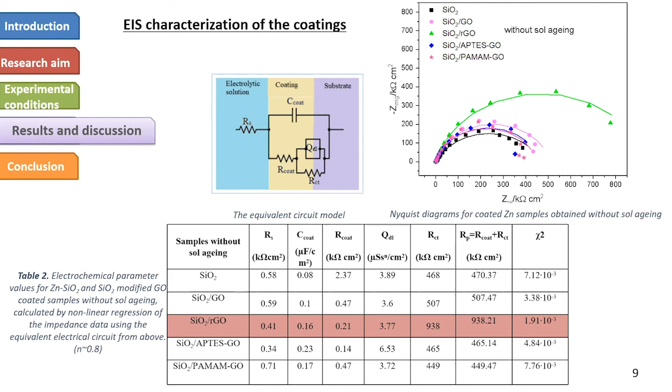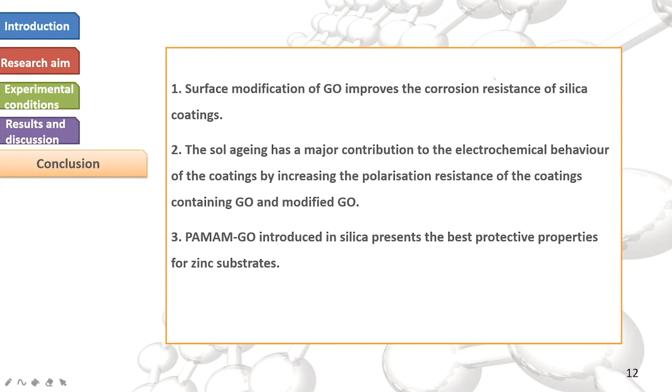In conclusion, the surface modification of GO improves the corrosion resistance of silica coatings. The sol aging has a major contribution to the electrochemical behavior of the coatings by increasing the polarization resistance of the coatings containing GO and modified GO. And PAMAM-GO introduced in silica presents the best protective properties for zinc substrates.

Thanks for your attention.